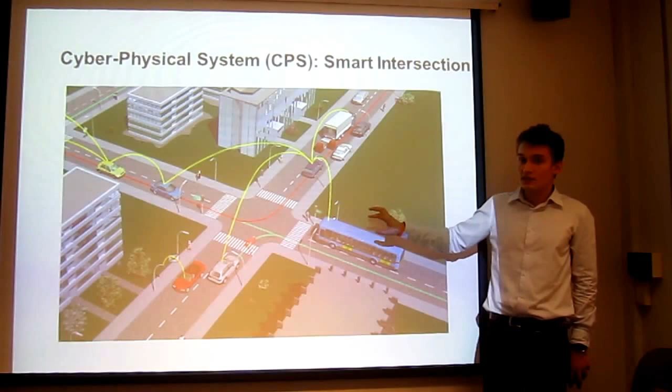Okay, so imagine you need to create a cyber-physical system, or CPS, a smart intersection. The system would be installed at every vehicle, and it would help vehicles drive through the intersection automatically and safely. The least you would want to do to create it is to write the source code in something like C or Java that would tell vehicles what to do and when. But this is by far not enough to create a modern and safe cyber-physical system. You would need to do a fair amount of modeling as well.

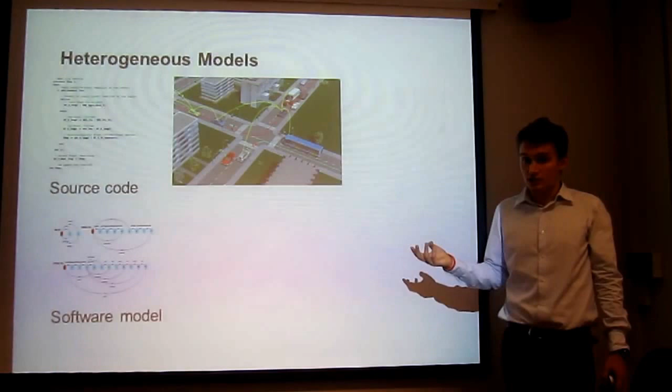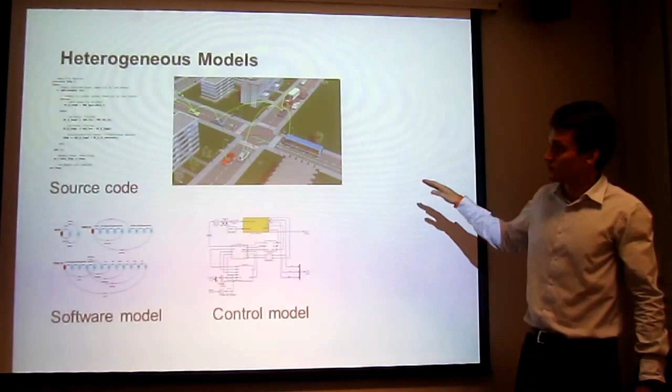For example, you could create a software model that would check if your software has any concurrency bugs, such as deadlocks or race conditions. You could use state machines or process algebras for that purpose. Then you might want to create a control model in order to refine your controller to make sure that cars drive smoothly and appropriately at all moments.

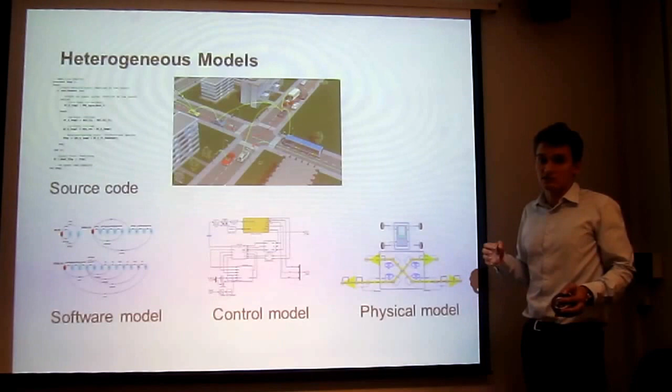You might want to create a physical model using, for example, Modelica, to study closer the forces that act on a car and the physical characteristics such as braking or turning. You might create a hybrid model using, for example, KeYmaera, to make sure that the continuous behaviors of your system play well with the discrete decisions of your software.

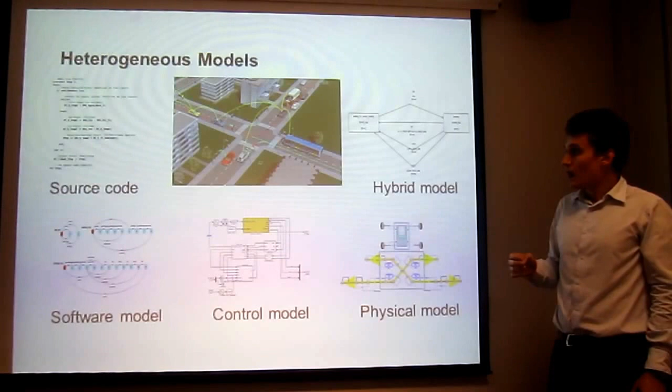All these models are known to be heterogeneous because they are created using very different formalisms and describe potentially different parts of the system at varying levels of abstraction. Despite all the differences, they are all very useful to address varying aspects of the CPS design. However, their differences make a lot of room for inconsistencies in between models.

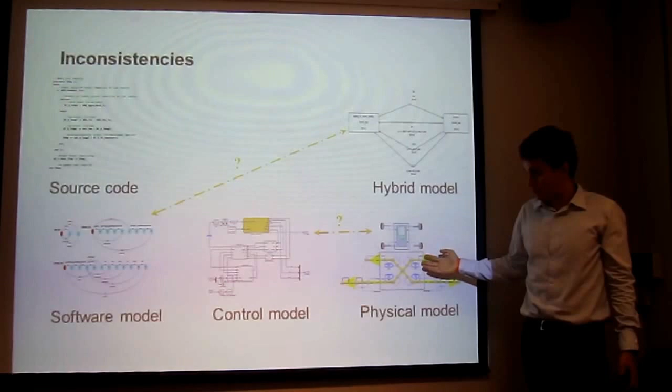For example, how do you know that your hybrid model respects all the decisions made in the software model? Or how do you know that your control model behaves appropriately according to the characteristics of braking that are defined in the physical model? These issues, if not found at the right moment, may result into critical failures of your system. Another challenging aspect of CPS work is verification. That is, how do you take all the models and the information in them and prove that your system is safe?

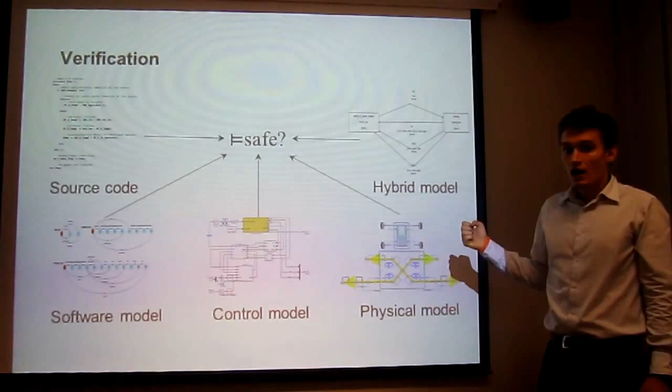Here's our solution. We call it an architectural approach to cyber-physical systems. We take all the models and we create an architectural view for each of them. An architectural view is an architectural high-level model created in a flexible and rich formalism of an architecture description language. We use Acme for this project. Each view highlights the important aspects of the model and abstracts out the details that are not important to other models.

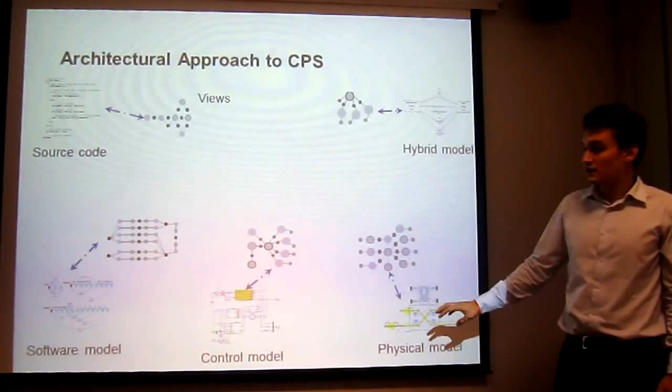Now that we have the views, we can establish relationships or mappings between them and check for consistency of the underlying models. Or we can even create more views and relate the existing ones to them in order to simplify verification. For example, you could take your braking times from this model and propagate it to this level in order to prove that your system adheres to the safety specification.

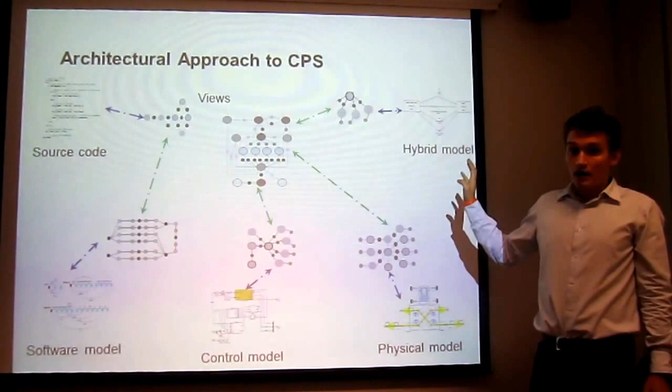This is a very powerful approach of dealing with heterogeneous models that does not mean that you have to necessarily dump one of them or any of them, and you do not have to model your system in one single formalism, which would probably be very inefficient.

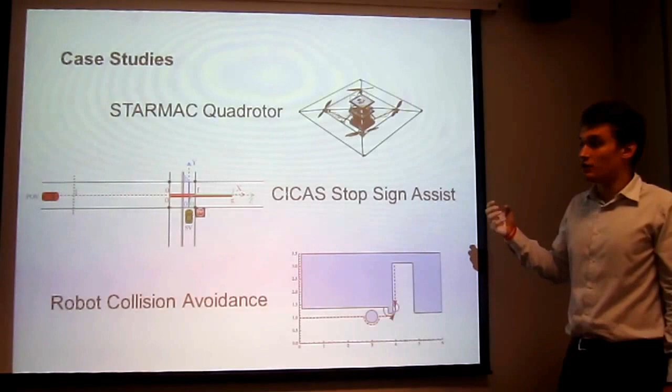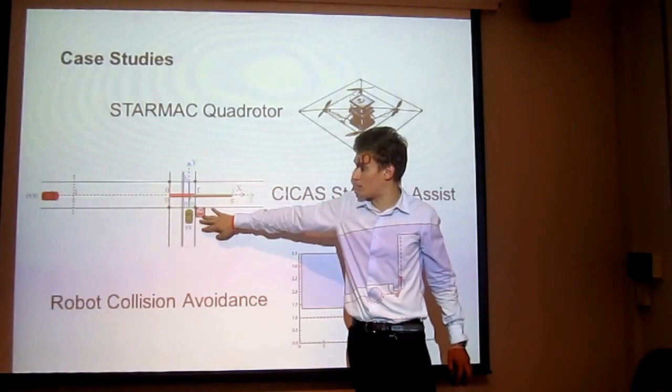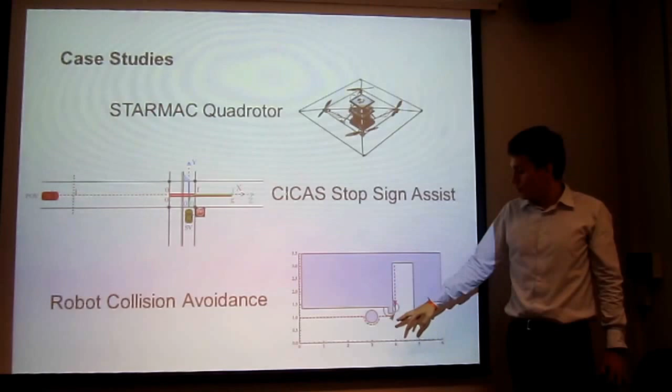During our project, we did a number of case studies. One of them, STARMAC Quadrotor, had a goal of checking the consistency of the models describing this quadrotor. Another one, CICAS Stop Sign Assist, had an objective of verifying the safety of an algorithm that told the car whether it's safe or not to move through the stop sign. Our current project, Robot Collision Avoidance, has a goal of designing and verifying the controller for a moving robot so that it can safely avoid the obstacles.